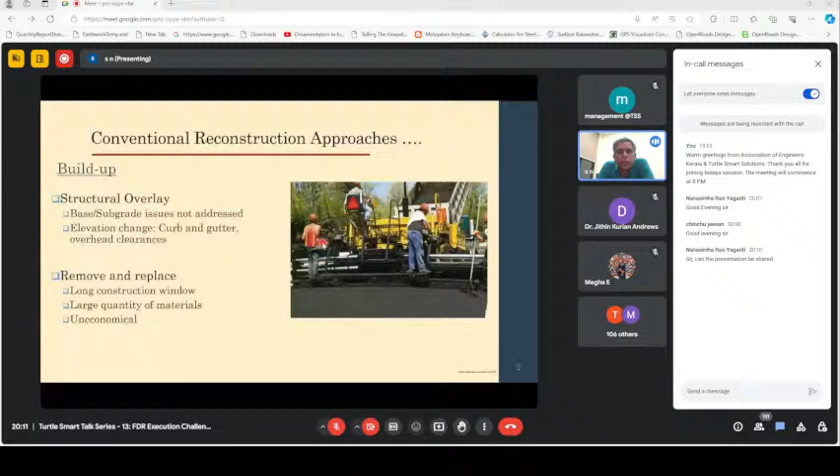So this can lead to, again, a lot of benefits, as you can clearly understand. The quantity of resources required is less. The construction window can be very short because of immediate strength to the section layers. So the construction window can be small. Then since the new materials that are being used is much less, it's an economically viable option as well.

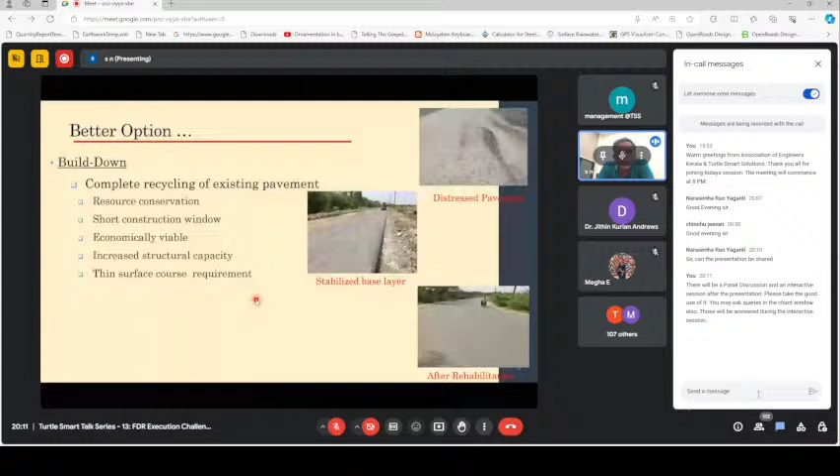Now, the structural capacity of the road itself can be improved because it's an entirely new section that we are building, and we can customize it depending on our requirements at any given point of time. And on top of all these things, there is the additional virgin material that is required in terms of surfacing, which is typically what is practiced in case of PMGSY roads. Typically, we give about 1 to 2 inches of overlay BC layer on top of the existing or reconstructed FDR, which will cater the requirements in terms of surface protection and smooth riding comfort as well. So all these things come out to be advantages of using this recycling option.

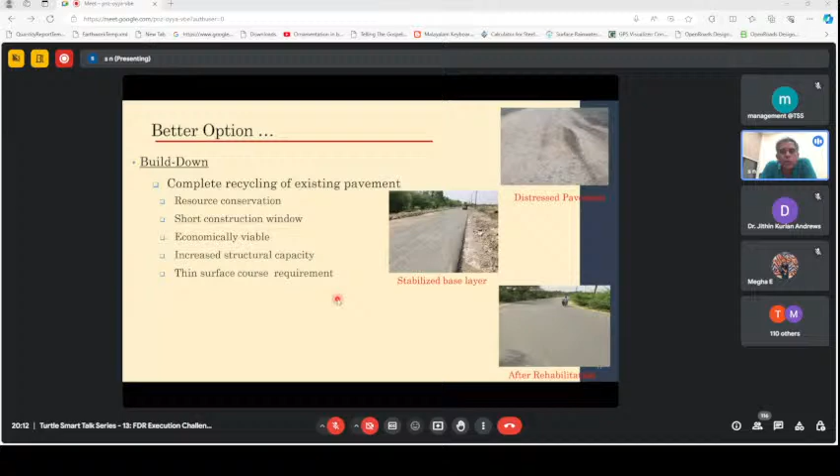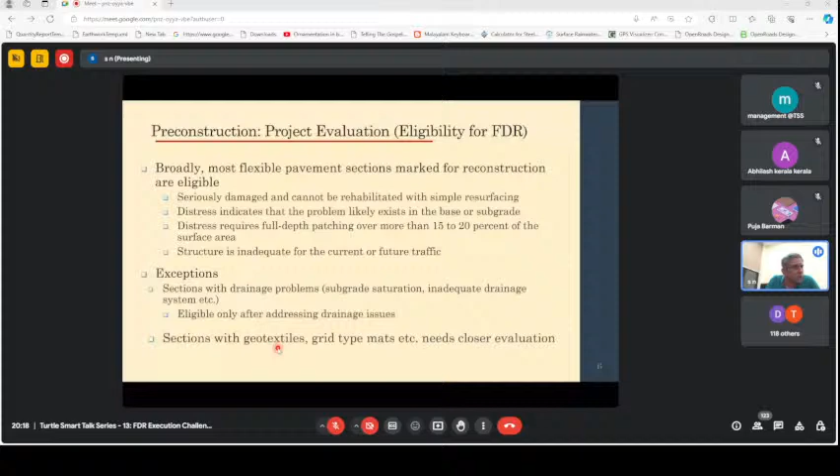Now, the other thing to be careful about while selecting a road is to see if the road has geotextiles, geogrids, or anything like that already present in the road. If a road has these geotextiles, then it is ideally not a suitable candidate for FDR. The simple reason is these are textiles or sheets or layers, and what we are doing in this process is to remix the entire material that is there. That includes the bituminous layer, the base layer, and the soil as well.

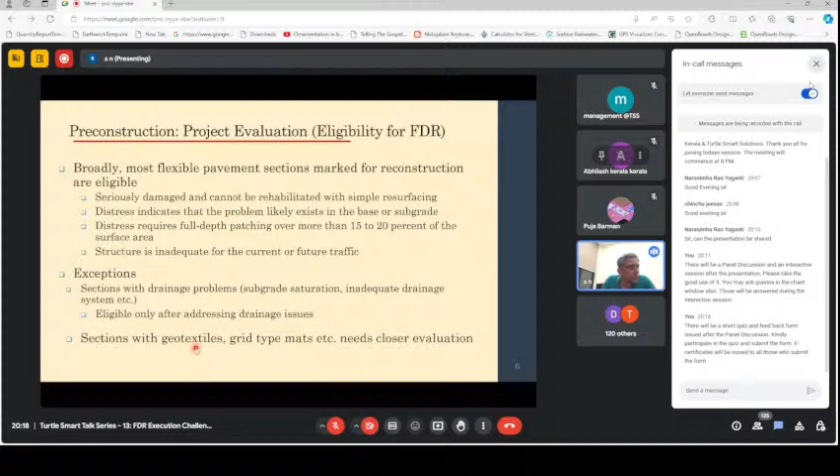So when you are using a reclaimer to mix up these three layers, a geotextile layer in between can negatively affect the proper mixing of these layers, both the mixing of the in situ layers and the mixing of cement with these layers, and it can also cause damage to the machine that we are using. So because of all this, if a pavement section has geotextiles or a geogrid in there, it is ideally not a very good candidate for the FDR option.

Now, in terms of process, I know that you already know about all these things, but just to recollect, we are working with the existing HMA layer, the existing base layer, and a part of the subgrade layer. The process involves multiple steps or stages. We can rather call it a train, because it's a continuous process where the stabilizer is dispersed first, followed by a spreader that spreads the materials evenly across the width of the pavement.

Then the recycler, along with the additives or chemicals or water, comes in, mixes up all the materials together and adds the required additives and water, followed by a set of compaction approaches, like static compaction, then sheepsfoot rollers, and all those different kinds of compaction, which I know you are familiar with. So I'm not going into the details of that.

Now, starting off into the challenges that are faced in FDR execution. Many of these things kind of feel very rudimentary for you, but these are significant enough to affect the timely completion of any given FDR projects.

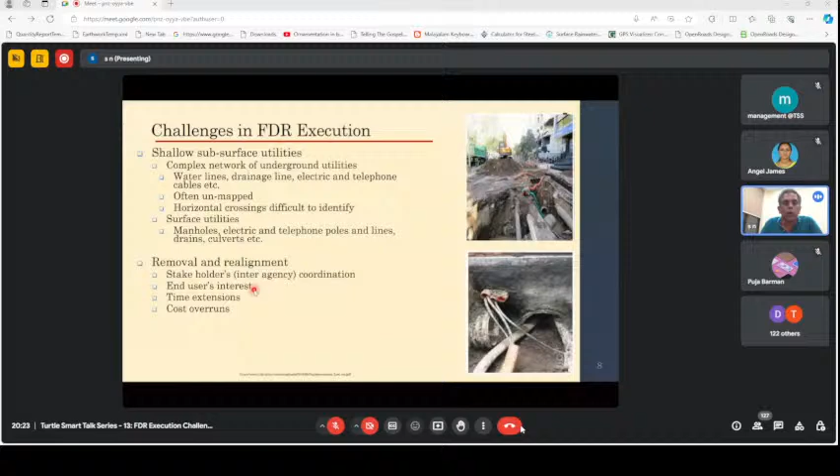These kinds of stakeholders, let's say a shop owner, might have his own preferences in terms of certain things. So we will have to accommodate all these things while relocating. The bottom line is that this can lead to time extensions and in many cases cost overruns, which unfortunately cannot be completely estimated prior to the start of any given project.

So only after the work gets awarded and the area has been allocated do you start looking at this. And this has got to be done as early as possible, because this can take time and cause delays. So the process of identifying these utilities has got to be done in the very beginning.

Now, the other problem that we typically face is that the depth of the existing pavement many times is actually higher than the FDR thickness. Typically, what we do in terms of FDR thickness is about 25 centimeters; 20 to 30 centimeters is something you can reasonably think of.

The reason why it becomes problematic is that cement has less binding with bituminous materials. The cement gains its strength by reacting or interacting with the soil and the granular materials underneath the existing pavement. So interaction with soil or with granular materials gives the strength.

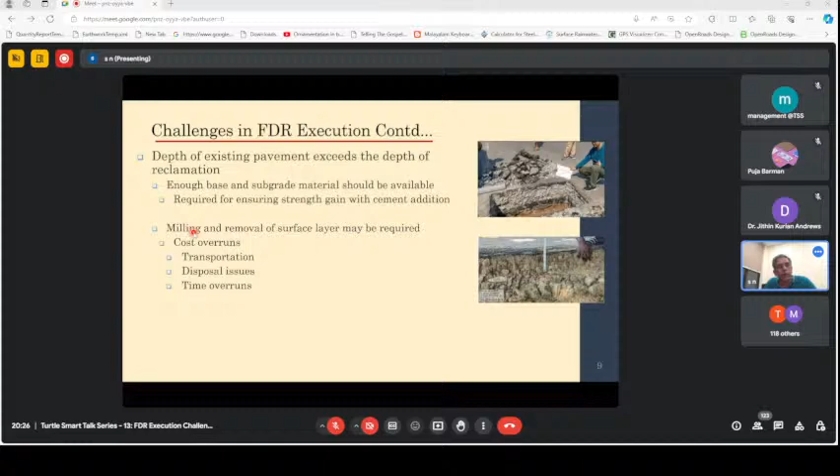Now the other one is different layer thicknesses. As you know, if you take a 5 kilometer stretch on a village road, you might have a small section, like half a kilometer, which has gone through significant damage, and some agency has come in and done a couple of overlays to address this problem.

Now you take your samples for material testing from the section before that, and when you get to that particular section, your entire bituminous layer thickness is different, which means the mix design you prepared using the first location sample is not going to be very effective in this case. That is one problem in terms of thickness.

Now, the other thing is differences in layer composition. In Uttar Pradesh, in many of the works that we do, one thing commonly observed is brickbats. People put brickbat layering, and bituminous layers are placed on top of that. So you may end up having brickbats in there. There might be boulders that were put in the very initial phase of the road's construction.

Then there could be different aggregate sources from which they collected materials. The soil types can vary with location. So the mix design you are using has to account for all these things one way or the other, so that uniformity is maintained all the way through.

Let's say you have multiple layer thicknesses of HMA because of overlays; you can mill out some of those sections and take them out. That can solve your problem and bring it back to the original mix design we prepared. Or in certain cases, you may require more than one mix design. So all these things need to be identified at the DPR preparation stage itself, so that work can go on smoothly.

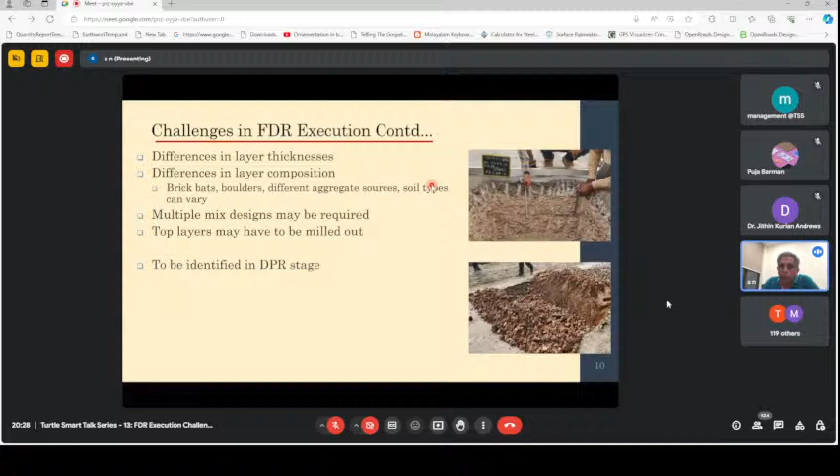Now, one of the other problems we typically face is realignment issues. Many of these old roads may have multiple curves; they are not designed to maintain a specific speed. So once you're reconstructing, you cannot just do the same thing, because speed requirements have changed. If you want to make a 50 or 60 kilometer per hour roadway, then realignment of the road and smoothing of the curves have to be done, which means the curves need to be straightened in many areas.

Now, all of a sudden, when a centerline changes, what happens is that the materials of the existing road, based on which we made the mix design earlier, are actually falling out of the centerline. Which means that those materials need to be shifted because issues can happen. Then cut and fills can emerge.

Now, realignment brings in a cut section, so all of this has got to be cut and removed, and there might be places where filling has got to be done. This has got to be identified. See what is coming up.

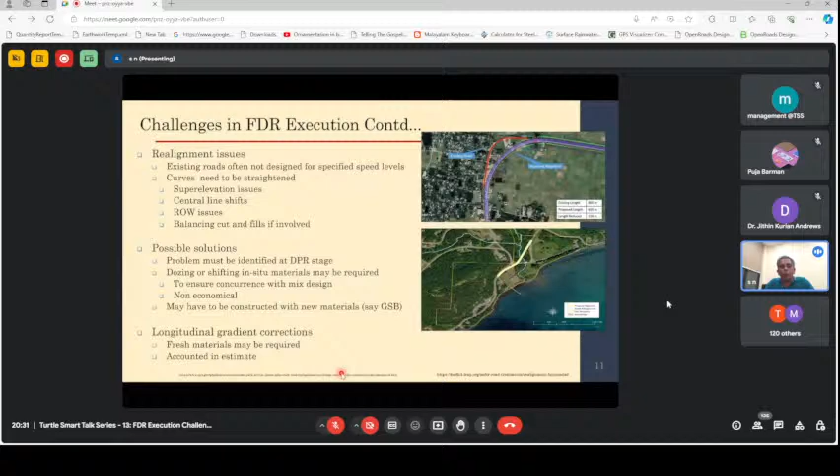And if it is there, it's going to be a significant and cost-bearing quantity. So it has got to be accounted for as a part of estimate preparation. Now, the other problem that typically comes across in case of FDR is problems with subgrades. You might encounter soils which have very high plasticity.

As I've discussed earlier, if the plasticity goes above 20 or so, then cement may not be a very good option. This may not be something that you see always, especially if you are working in agricultural areas, say for example rice paddies. The clay content in those soils is going to be quite high compared to a residential area. So those kinds of things need special attention,

and again it can only be addressed in a site specific manner. When high plastic clays are present, they absorb water, and when cement is put along with that and you try to mix it, mixing is not going to be uniform, and as a result you might have sections with very high strength and very low strength. It will be a mixture which cannot be predicted upfront. So that problem has got to be addressed in a site specific manner.

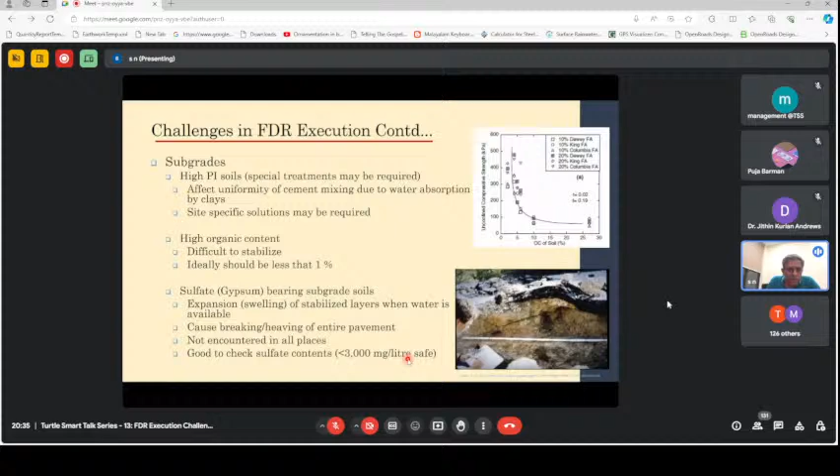Now, one of the other things that you typically encounter is related to shoulders. People have come up and said that shoulders are not required. Well, it actually contributes to the structural strength of the road itself, simply because it can avoid edge cracking, and it will stop the vehicles from going off the road. Otherwise there is going to be a differential, a cantilever kind of an action on the roads, or rather a non-uniform kind of loading along the edges, and it can lead to edge cracking.

Now the other problem is drainage options. Many a times we work with road sections which are limited by right-of-way availability, and provisions for drainage are many a times ignored because of cost constraints, right-of-way issues, and all those things. So you have to make sure that there is no waterlogging in these areas, and also a reasonably good drainage provision is available, either a constructed one like concrete drains or brickwork drains, or even an earthen drain that can effectively remove the water from going underneath the pavement section. So once water comes in, then you are going to...

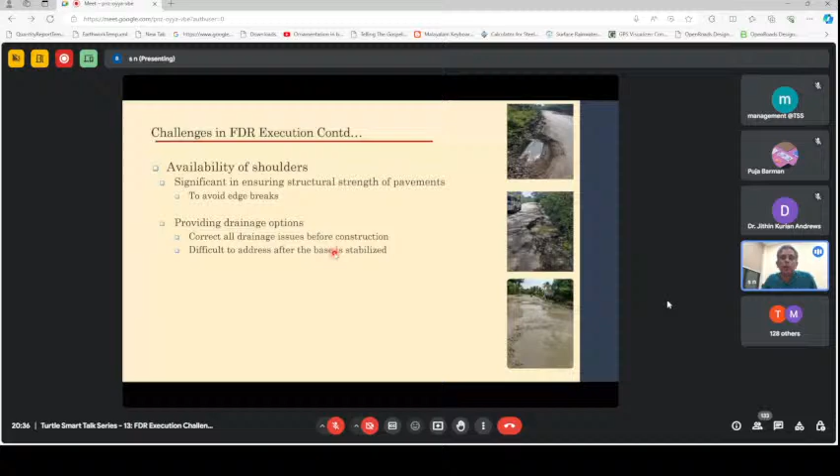The challenges on the administrative side. Now, this is related to payments that are made in construction. If you think about this whole process, this is going to be quite expensive in terms of construction materials being used. The machinery you are using is going to be hugely expensive as well. So any delay in payment can actually lead to a huge financial loss to the person who is working, the contractor basically.

If I give you a ballpark number, an idle set of machinery lying on a site over a period of 1 month can cost the contractor near about 25 to 30 lakhs. That's the loss incurred if a machine stays idle on a construction site for 1 month. This is a ballpark number, it can vary depending on what all is there.

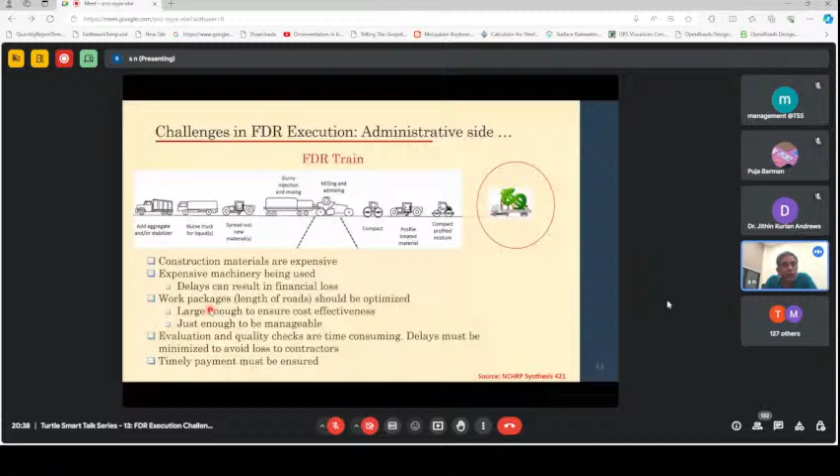Now, on the administrative side, there are other things you have to look at, that is managing your work packages: how much work is to be awarded to a given contractor. It should be such that it is cost effective for him, and also manageable. In Uttar Pradesh, initially, every package given to one particular contractor was around 30 kilometers, not a single stretch, at different adjoining areas, wherein the equipment can be mobilized easily from one side to the other as we go along. These are also quite...